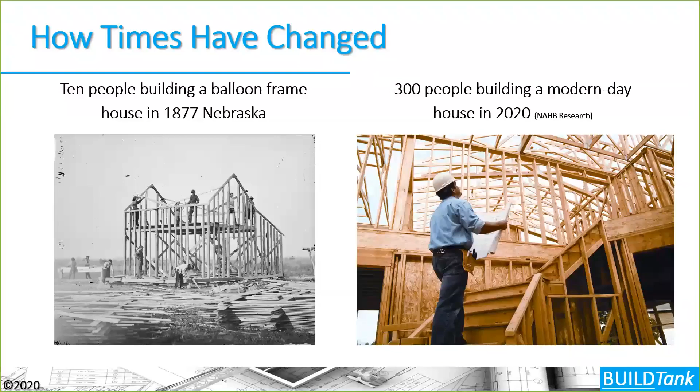Today, the National Association of Home Builders has helped to determine, through research, that around 300 people are taking part in building that house, which means each individual trade partner, builder, and architect has specialized at a specific function of putting that house together. We have lost, to some extent, our ability to understand the holistic approach and how things go together. Therefore, we've begun to adopt systems and processes to help us build better houses.

We also are seeing that our labor issues, supply chain issues, and other issues we have to deal with have made construction a little bit harder. But our expectations of our houses have gotten more robust over time as well. You see some houses here that were built in the early 1900s, and right next to them houses built in our present day.

This really demonstrates how our expectations of our houses have changed, not only from an aesthetic perspective, but if we take comfort, for example, we see that people literally want to be able to walk around inside their home from room to room and floor to floor in their underwear and be comfortable. That definition and quantification of comfort was quite different in the early 1900s. People were willing to work to create a comfortable home. They understood that they had to put on a sweater in the wintertime, put a log on the fire, or shovel some coal to create a comfortable environment.

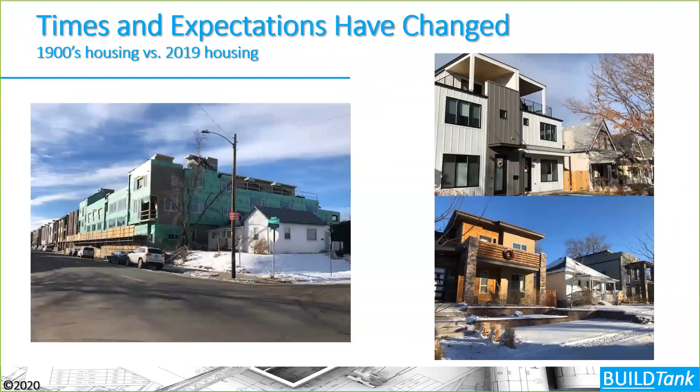Because that has changed so dramatically in our modern day housing, we've had to also change the way that we construct our houses and the way that we approach that construction. What we see is that codes and programs have embraced this notion of applied building science and systems thinking, these two avenues to help us achieve the house performance that we're trying to achieve today.

This notion of applied building science is really looking at all of these different components and how do we integrate them together into a home to create a home that meets those core expectations that people have of their houses - core expectations of not only comfort, but long-term durability, energy efficiency, aesthetically beautiful homes, indoor air quality, and health and safety. All these different things need to be integrated into our houses.

So we need to think about the envelope, ventilation, lighting, water efficiency, and all these different things, and how do we integrate that.

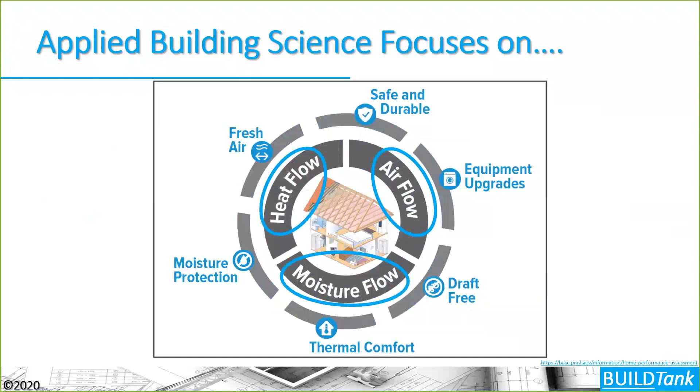If we take one step further and look at this a little more closely, we ultimately see that applied building science is really focused on airflow, heat flow, and moisture flow. How do we get performance out of the house? How do we get long-term durability out of the house? How do we get additional efficiency out of the house? How do we meet those core expectations? Well, we have to be able to control heat flow, airflow, and moisture flow in order to do that.

Which leads us to kind of the systems approach and thinking process for how we approach the building of a house. It is this more holistic approach rather than a component approach, going back to having a better understanding of the whole process of construction and how we integrate all these things together.

Another thing that systems thinking does is really revolve around this word synergy. Synergy meaning two or more things that come together to achieve something greater than what could be achieved by itself or on its own. These core expectations that our buyers and builders of houses have are examples of being able to achieve something that we couldn't achieve before. How do we get that beauty, that comfort, that durability from a house?

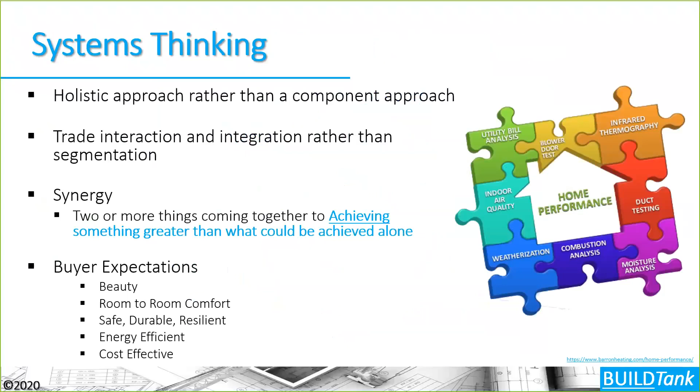When we're adding complex heating and cooling systems, we're tightening up the building envelope, we're adding insulation to our systems. And in the past, doing those things has created building durability issues. Now we can do it if we change our approach and create a house that performs and doesn't necessarily have those building durability issues.

Systems thinking and synergy can be thought of by thinking about how we bring two components of a building together. Normally we have one outcome we're trying to achieve. For example, if I'm bringing insulation and an air barrier together, I'm thinking about how to control heat flow through the building thermal envelope. Well, the reality is I'm also getting better air control in that house, better moisture flow control, and better indoor air quality. So bringing these two simple components together, we get a variety of outcomes. That's the synergy that's brought into it.

Thinking about that in the design phase early on in the project is what really becomes important. As we move into more of the Zero Energy Ready Home program discussion later in this series, we'll see that planning at the beginning of the process becomes crucial to ensure our goals for that house are achieved.

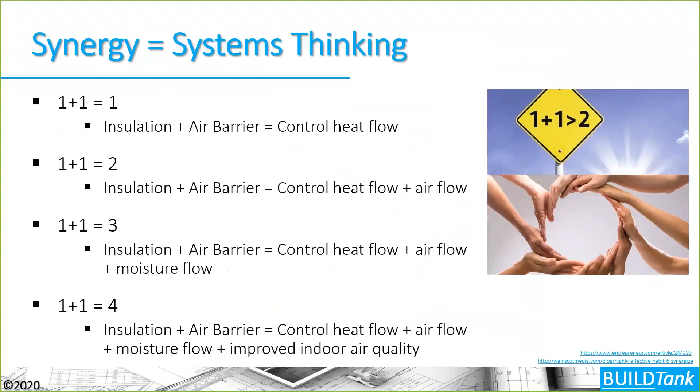When we think about building systems integration, we can think about 5 main components: the structure of our house, how we integrate the structure with the systems, from mechanical systems to insulation systems; the enclosure, how we keep water out of those systems and components; and the specific climate we're building in. The fifth thing is how people interact with these other systems, and how we create this whole product that integrates the structure, the systems, and the enclosure in the particular environment we're building in, so that people will actually be able to use it.

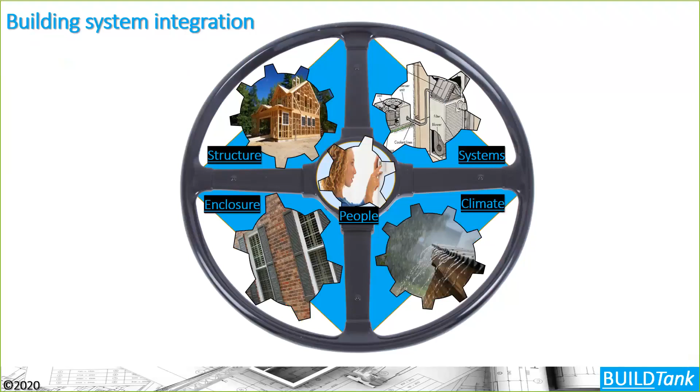Because people tend to be the wild card in our equation. People don't really know much about the house they're moving into. They don't know what they don't know. They don't necessarily know that they need to change a furnace filter or do continual maintenance on the house. They care about different things than we do in the construction industry. They have expectations of their houses, but how do we meet those expectations? We need to integrate this applied building science and systems thinking approach in order to meet those core expectations.

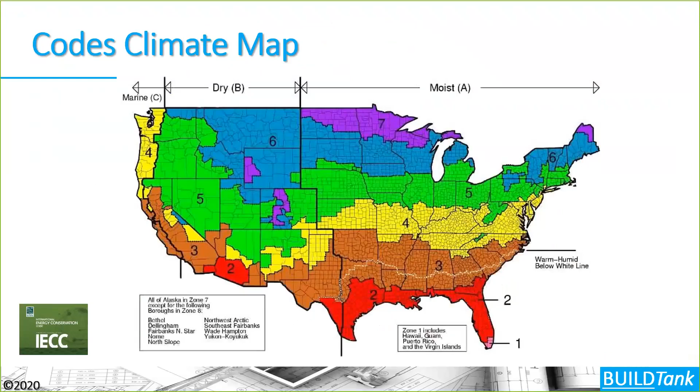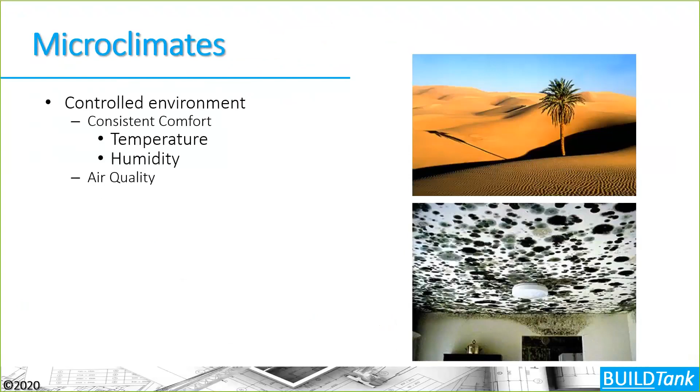Maybe a little bit less from a humidity perspective, but we do have a lot more humidity inside our houses than outside, which might lead us to think about how we're constructing our houses because of the moisture drive happening there. Taking into account the climate we're building in is very important. Some building science principles don't really change, but how we implement those principles could be slightly different in dry climate zones versus moist climate zones. We also need to think about the impact of climate zone on microclimates inside our houses - moisture being impacted by temperature and humidity. We're trying to control that indoor environment to get better indoor air quality and ensure we're not getting mold or other problems in our houses. So when we talk about gaining predictability and control, which we'll talk a lot about today, how do we get that predictability and control?

From a building science perspective, we get predictability and control by tightening up our building envelope, having well-insulated building envelopes, designed and well-executed mechanical systems, and whole house control mechanical ventilation. That control and predictability helps us manage the microclimates we create inside our houses within the bigger macroclimate of the climate zone we're building in.

Microclimates are generally in moist areas we're most concerned about—kitchens, bathrooms, laundries, crawl spaces, basements—locations that tend to trap or are bigger moisture sources inside our houses. But the reality is that the whole house is a microclimate within the bigger macroclimate we're building in.

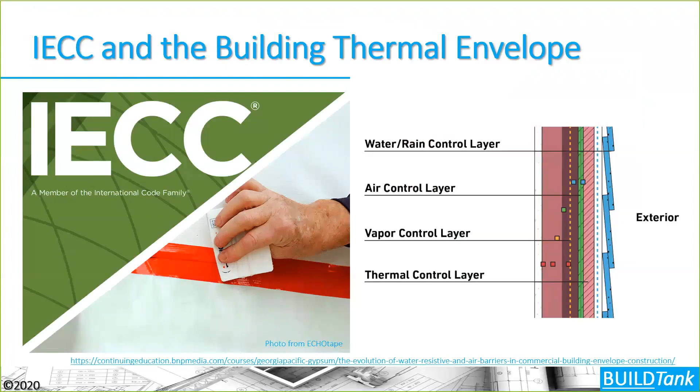The IECC and all these building programs really concentrate heavily on the building thermal envelope, trying to understand these different control layers—water control layers, air control layers, vapor control layers, and thermal control layers inside our building assemblies. The IECC has a new section developed in the 2015 cycle stating that the building thermal envelope shall be represented on the construction documents.

This highlights what's called, from a building science perspective, the red line test—meaning you want to be able to put your pen on a sectional drawing of your plans and continuously draw a line without lifting your pen off the paper around that building thermal envelope, to ensure you understand where the continuity of that thermal envelope is going to be and how you're going to execute that particular portion of it.

The building thermal envelope is also defined in the code, and that definition talks about all the different components—so the thermal envelope really is an assembly of things that separate the conditioned space from the unconditioned space in our houses.

We can see that the thermal envelope from a drawing perspective can be pretty straightforward, but when we're looking at that building thermal envelope inside the house, it might be difficult to determine exactly where we're going to have that envelope and how we're going to execute it to get control and predictability of airflow, thermal flow, and moisture flow.

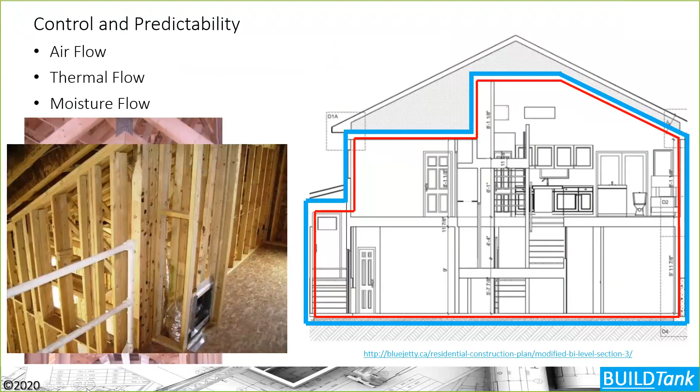So what the code is trying to do is ensure we can do that red line test, so that when we get into the field we can identify areas where we need to put those supplemental air barrier systems into our home. Air barrier systems are defined here too—we talk about the continuity of the air barrier system, which is defined in the IECC, and what an air barrier actually is.

Again, an air barrier is one or more materials that join together continuously to restrict or prevent the passage of air through the building thermal envelope. So we're really talking about assemblies of things.

Often when we talk about this air barrier system, we tend to think of it as one component, just the component on the exterior side of the assembly. I'd like to challenge us to think about it as a total assembly, which means that in its simplest form, we have interior drywall as the interior part, and we want continuity there. Then we have exterior sheathing as the exterior part. Together, we get a true assembly that goes all the way around our building thermal envelope.

Some may ask, what about house wrap or other weather-resistant barriers? Well, they're primarily drainage planes, because we know that moisture is going to bypass our siding, and we need to be able to drain that water down and out.

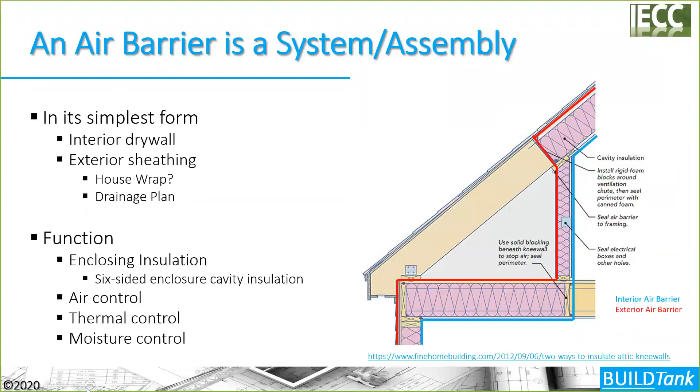Now the code helps us, and programs like Energy Star and the DOE Zero Energy Ready Home program have checklists that the code borrowed from to create this table, which gives us an idea of where we might need that supplemental air barrier system, where the drywall might not be adjacent to our thermal barrier, and therefore we might need to add thermoply, or if we're using spray foam, that might be our air barrier system.

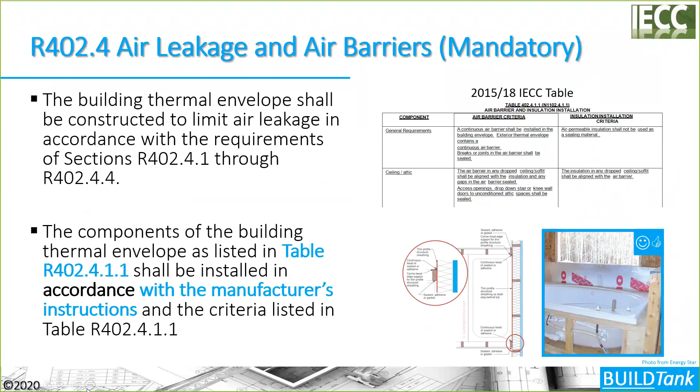And all of these things, the code falls back on manufacturer instructions, but there are some instructions in these tables and checklists from programs like Energy Star and the DOE program to ensure we've installed these things perfectly. But when we're talking about that air barrier system, the reality is we need to create an air barrier assembly that has these 5 key attributes.

Its continuity all the way around the building envelope, its strength, its durability over the life of the building, its stiffness, and its impermeability.

Sometimes we want to use flexible air barrier systems, and often those flexible air barrier systems cannot be installed well enough to actually perform. So if you stick with these 5 key attributes, you'll get a system that actually works.

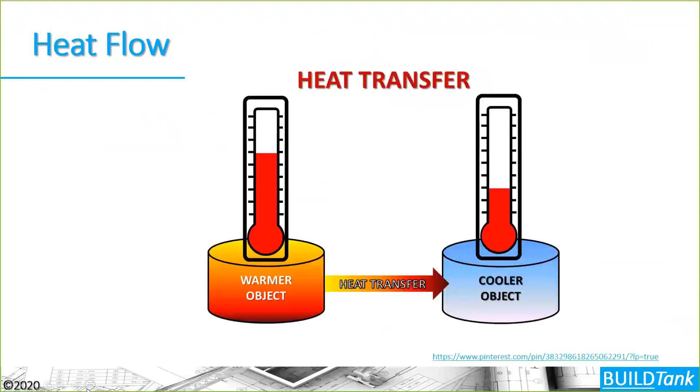So moving into the applied building science section, we're going to talk about thermal flow in our houses first, then airflow, then moisture flow. So if we break down thermal flow, we begin with the heat transfer mechanism with regards to thermal flow.

The first law of thermodynamics says that energy cannot be created or destroyed, that energy moves and changes form, that heat flow is an energy transfer mechanism, and that energy equals work plus a change in that internal energy system, or what we call waste. It's not that waste isn't energy, it's just that it's not being used for a useful purpose.

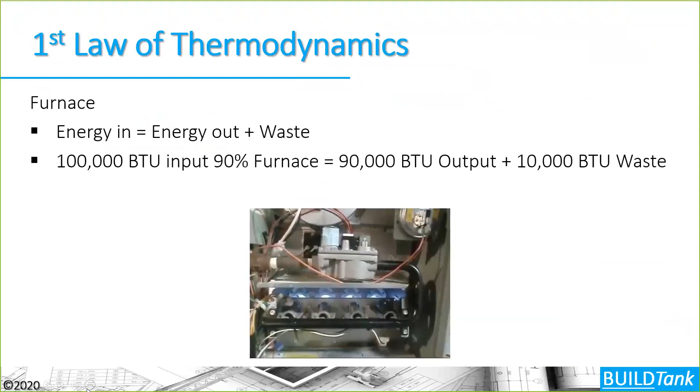An example of that would be a furnace, where energy equals energy out plus that waste. So if I have a 100,000 BTU furnace and it's 90% efficient, then 90,000 BTUs are the output of that furnace, and 10,000 BTUs is the waste, basically the amount going up the flue. That would be an example of this first law of thermodynamics.

Now, the second law says that heat moves from higher temperature regions to lower temperature regions, meaning basically always from hot to cold, or higher concentrations to lower concentrations. It never flows in the other direction unless you're adding additional energy to the equation. And no reaction is ever 100% complete, so there is some energy loss or waste in these equations. As energy is transferred and transformed, more and more of it becomes waste.

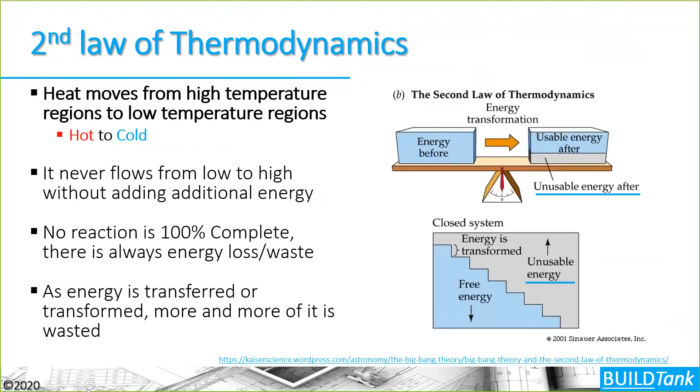So we want to be able to get as much out of it in that first transition from its source to its purpose, so that we have the least amount of waste possible in that system there.

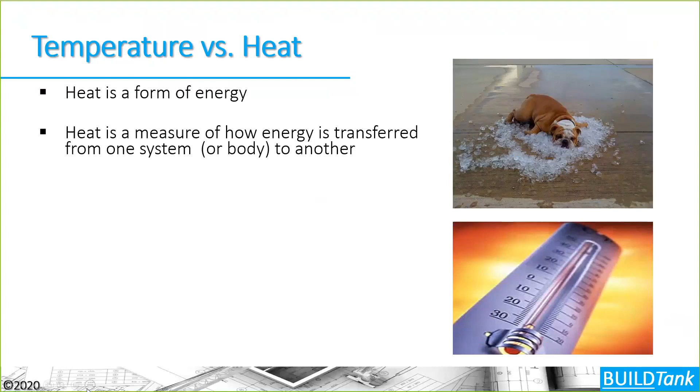Temperature and heat are also slightly different things. Heat is the form of energy, and heat is measured as the measurement of how energy is transferred from one system or body to another. So, for example, this dog's energy or heat is moving from the dog's body to the ice cubes, and it's actually the removing of that heat from the dog that's cooling the dog there.

Now, temperature is a measure of the internal energy of a system, a measure of how fast the molecules are moving, and this is basically how we can measure it using a thermometer here.

Heat transfer is the exchange of thermal energy between physical objects, so it's always moving, again, from hot to cold. And what we learn by understanding this is that things don't have to be hot necessarily to be able to move energy.

And so when we think about a heat pump, for example, a heat pump can take energy, can move energy from one location to the other location, as long as there's higher concentrations of energy in one location versus the other location. So in very cold air, for example, it's amazing how much heat or energy is in that cold air, that you can actually extract and bring into a home during the heating season and heat a house. Some of these heat pumps can

extract energy in air that's in the freezing temperature range. So it's pretty amazing here.

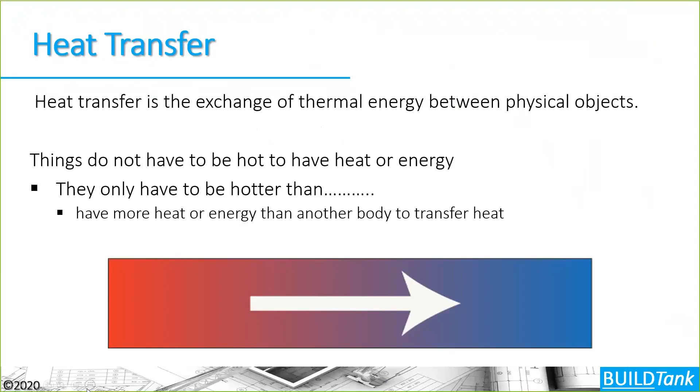This heat transport mechanism, and this temperature difference from inside to outside, are one of the key principles of what we call delta T, or the temperature difference, and the movement of energy from higher concentrations to lower concentrations.

It drives our design temperatures for our heating, cooling, and ventilation systems, our HVAC systems. Whether you're doing hydronic heat or using a forced air system, you're going to use a design temperature that's usually a worst-case design temperature for heating and cooling of that structure, and that's where it's governed by.

So to review just a little bit, the flow is always from higher concentrations to lower concentrations, and the higher the delta T, the greater the heat and air wants to escape or enter a building there. So we need to remember those principles here.

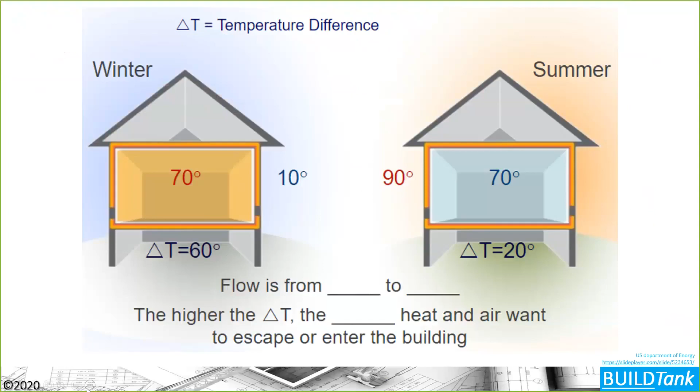There are two types of heat. There's sensible heat. This is the heat that's able to be sensed by that thermometer, the heat that's absorbed or added or released by a substance, and this is the energy described by the heat load calculations, the manual J's that we do to properly size our heating and cooling equipment inside our house.

There's also latent heat that we don't have a lot of here in Colorado, but this is the heat that's released or absorbed by a substance during a change in phase. This is the heat or energy that's stored in moisture in the air. That's why I say we don't have a lot of latent heat in Colorado, because we don't have a very humid climate here. This phase change is what describes latent heat.

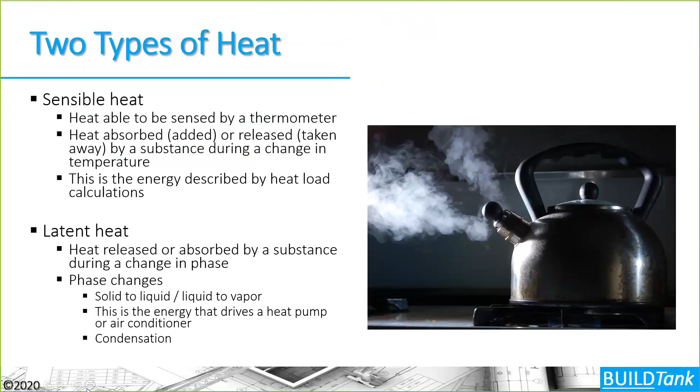So when we're moving from a solid, like a solid ice cube, to liquid water, into vapor, that is the description of this latent heat transfer mechanism that happens there.

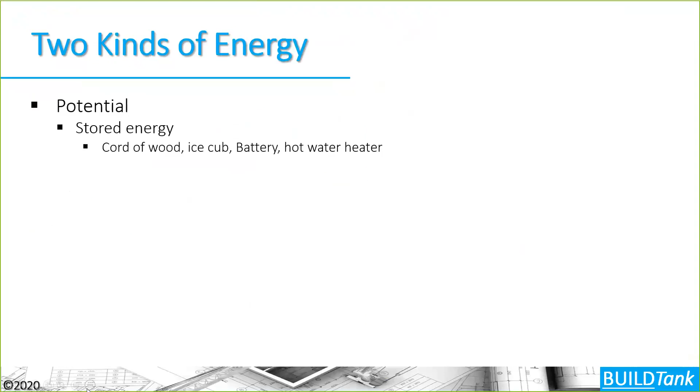Two kinds of energy: potential energy, which is the stored energy in wood or batteries or other systems, oil and gas, for example. And kinetic energy, this is the energy of motion, where atoms and molecules are in movement. The temperature of the energy is described by these atoms and molecules that are moving, that we can measure with a thermometer, for example.

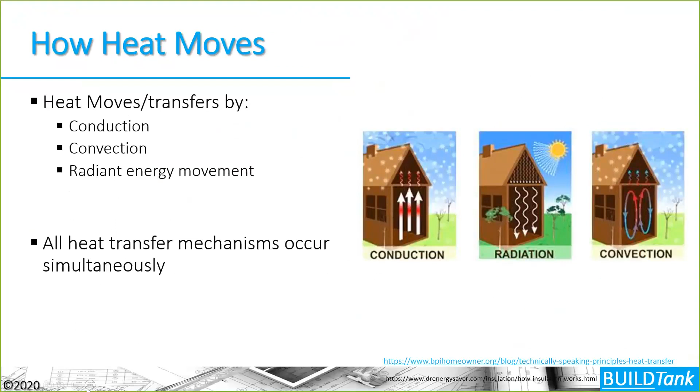Okay, so how does this energy or heat move in our houses? It generally moves by conduction, convection, and radiant energy movement. And all of these things are happening simultaneously, but we're going to break them down one by one.

And it's often helpful to understand a building durability issue or a building science question that you might have with your houses, if you can determine which is the most predominant heat flow mechanism that's happening through that particular piece of assembly. So understanding these things individually becomes important.

Conduction is the energy that conducts through a solid object, always again from warm to cold, or from higher concentrations to lower concentrations. When we think of conductive energy, we think of energy generally in the wintertime.

That's where we have a higher concentration of energy or heat inside of our houses, and it's moving through our assemblies from inside to outside, and we're using insulation to reduce that conduction through the building assembly. But we know that the energy will go more slowly through our cavity insulation, because it's a higher R value, than through our studs.

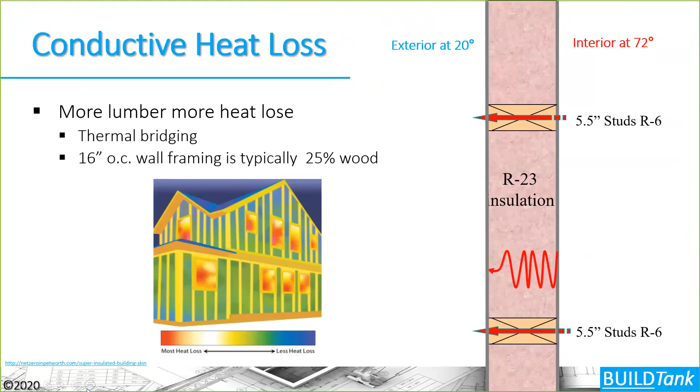So we're often struggling with how do we ensure that we're not getting large amounts of thermal bridging in especially cold climates where we're building. How do we reduce that thermal bridging, or that area where energy is going to move faster through our studs or other components of our buildings, like foundations. Foundations, and if we're not dealing with that slab edge of that foundation, can be a large source of thermal bridging or bypass in our assembly. So we need to think holistically about our whole house and where that thermal bridging is happening, and figure out details to be successful at slowing and stopping that thermal bridging, that thermal bypass through our assemblies.

Convection is the energy transfer of energy moving with fluids such as air or water. Convective loops are an example of convective energy movement inside of our houses, inside of our wall systems.

In a poorly insulated wall, you'll get energy or air warming on the warm side of the assembly. It goes up to the top plate, it rises as air warms, it rises. As air collects energy, it rises. It hits the top plate, it gets moved over to the exterior wall, and as it cools, it starts to fall, and you get this convective loop inside of a poorly insulated cavity insulation assembly.

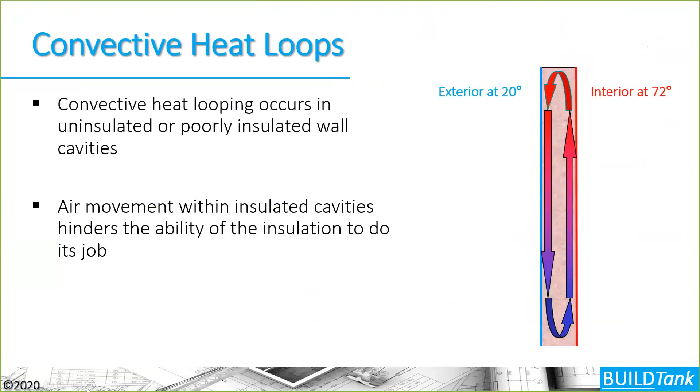Convective air not only moves potentially in our wall systems, but in our houses. Convective loops are a good way of distributing heat around our houses or energy around our houses, but we want to make sure that we control that convective movement of energy so it's not moving outside of our houses.

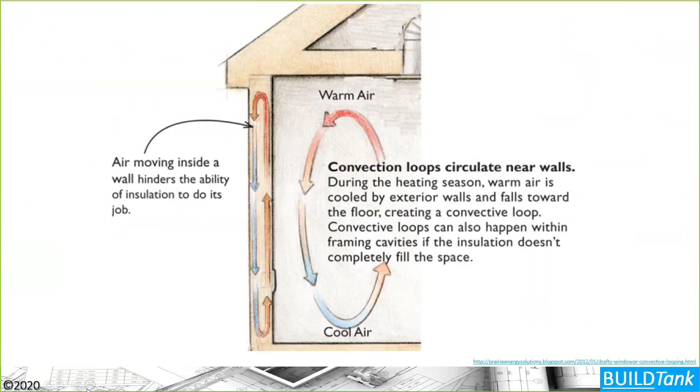Energy moving with air, we want to control it inside the building envelope. So again, a tight structure. Properly insulated and sealed assemblies are largely how we do that. So we need to think about how do we achieve that assembly.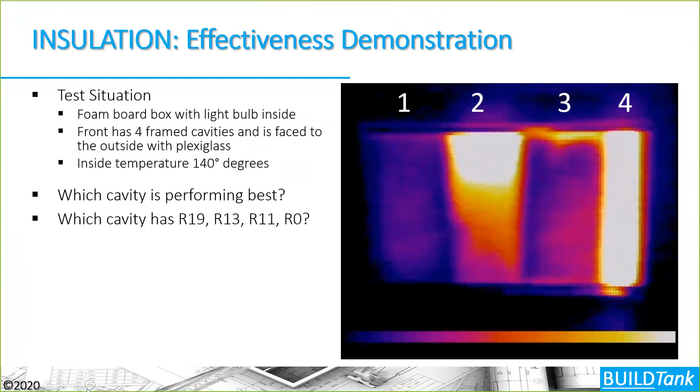And I think we would agree that the number one cavity is performing best here. So which cavity, is it performing best because it has the highest R value or because the insulation was installed the best in that cavity?

When we break it down here, we see that the first cavity has an R11 bat that was installed perfectly to a grade 1, or the requirements of code, with a proper air barrier system on all 6 sides of the cavity. Cavity 2 was an R19 cavity, so it had the highest insulation in the cavity, but it didn't have the best installation.

It has this gap at the top, so we have some bypass around the insulation here. Cavity 3 is installed better than cavity 2 with less insulation R value, but it's performing better than cavity 2 with the higher insulation R value because it's installed better, had a better air barrier system, better bat install. And cavity 4 had no insulation in and no air barrier system to the inside.

So this is just to show us that installation is really as important as R value. We need to make sure that we install the R value properly in order for it to perform. We'll talk about that in a little bit more here in a second.

The last way that energy moves in our assemblies is by radiant heat transfer, and this is energy that flies through open spaces.

The biggest example of radiant heat is the energy moving from the sun to our planet through open space, or from a fire to our bodies on a cold evening. It's interesting to think about radiant heat transfer because it's a very linear pathway of heat movement. If I'm standing by a fire, my front side might be nice and toasty, but my back side is going to be cold, because the energy can't move laterally around my body. It moves linearly, in a straight line.

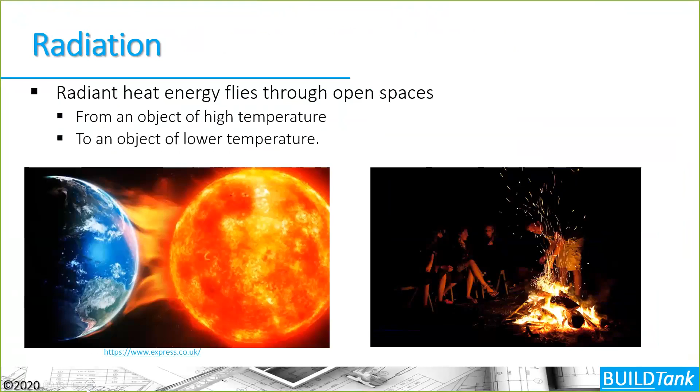Radiant barriers are sometimes used to help control this flow of radiant energy. We don't use a lot of radiant barriers in our climate, especially up in the mountains, but if you see anybody recommending a radiant barrier below a slab or in an attic, you need an air gap in order for that radiant barrier to work.

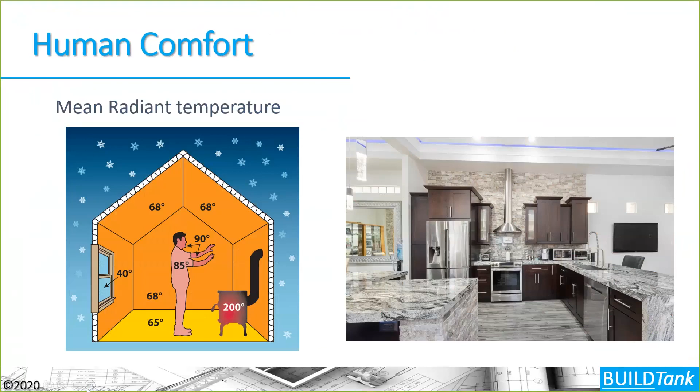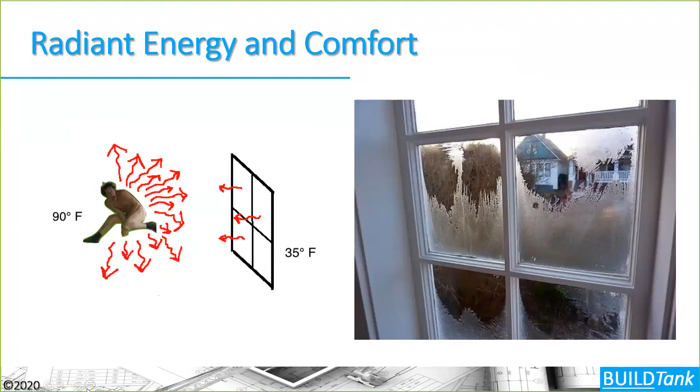Radiant energy has a huge impact on our comfort inside a home. This notion of mean radiant temperature is that our body heat will radiate to colder surfaces inside our home. If I can raise the surface temperature of the surfaces around me, I can be more comfortable. In some cases, like with large areas of granite countertop, that granite is a relatively cold surface - it's hard to warm up and keep warm. So I can be in my kitchen cooking and actually be cold just because my body temperature is radiating to that cold granite countertop, or radiating to the cold surface of a window.

These are things that help govern our human comfort. We have environmental variables - air temperature, relative humidity, air movement, and mean radiant temperature - the things that surround us. If I get better control of these things, I'm going to have better comfort inside my houses. Building science and system thinking can help me do that. And there are personal variables - the clothing we choose to wear, and our personal metabolic rate - impacting our human comfort as well.

When we think about these thermal transport mechanisms, we have to think about thermal transmittance - basically how building assemblies deal with conduction, convection, and radiant heat flow all at the same time. But if we break them down, we can often figure out what's happening in a particular component of the building, because it might be driven more by conduction, convection, or radiant energy flow than the other two. If we can determine that, we might be able to fix an issue, whether it's a warranty issue, or how to upgrade an existing building.

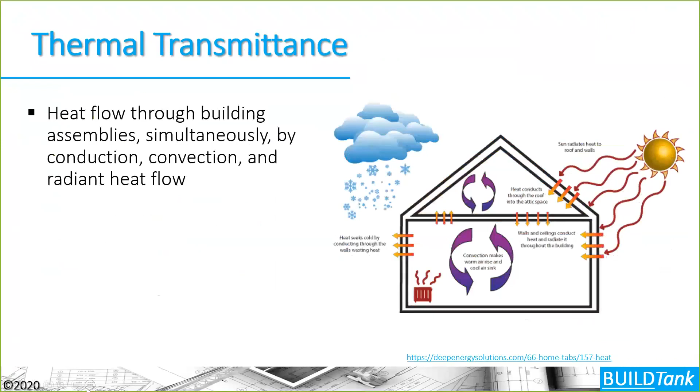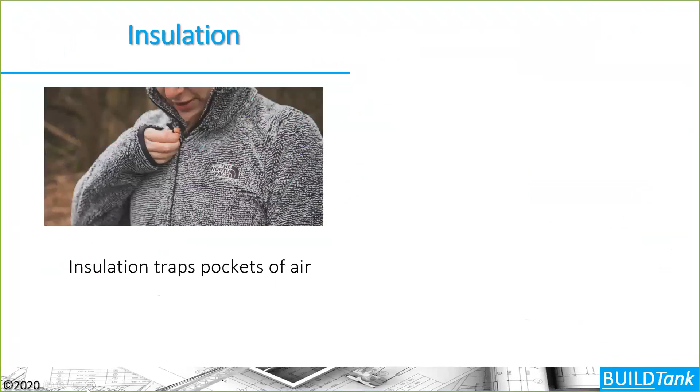Air sealing, from a code perspective, is largely looking at manufacturer instructions for how we install insulation inside of our assemblies. Codes and programs generally rely on the code in this section as well. When we're talking about insulation, just like insulation we wear on our bodies, the object is to trap a pocket of air. It's the pocket of air that creates the R value, the resistance to the flow of energy from high concentrations to low concentrations.

Ultimately, we need a stagnant pocket of air. Because if I wear a fleece jacket out on a cold and kind of windy day, the pockets of air being trapped in that fleece jacket are going to leave it, and I'm going to continue to be cold. So what do we do up in the mountains? We put on a layer of plastic, in essence an air barrier on top of the thermal barrier, or a shell on top of that thermal barrier.

So I have my interior air barrier, which is my skin. I have my thermal barrier, which might be a fleece jacket. And then I have an exterior winter shell that is my exterior air barrier system. I'm able to trap that pocket of air, and I'm able to stay out in the cold elements much longer.

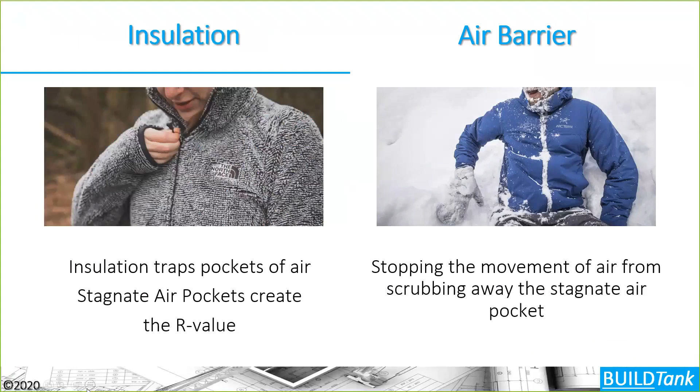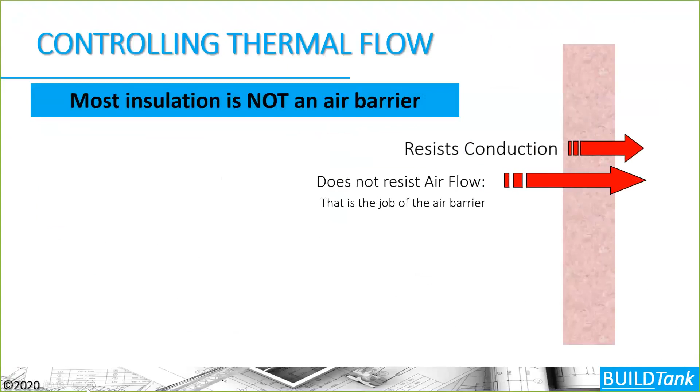Similarly in our houses, we've got a thermal barrier, oftentimes an air-permeable fibrous insulation that resists conduction but doesn't necessarily resist the flow of air through that assembly. So when we're talking about cavity insulation, we're talking about six-sided enclosures, so that we can resist this myth of insulation - insulation doesn't stop the movement of air itself. The object of that insulation is to trap a pocket of air, but I need that six-sided enclosure to ensure that pocket of air is stagnant, so I get the resistance to the flow of energy described by the R value of the material being installed.

Okay, let's talk about airflow now, and let's break that down. How does air flow in our houses? I like to think about airflow as a freight train. If you think about a freight train, it's carrying cargo from point A to point B.

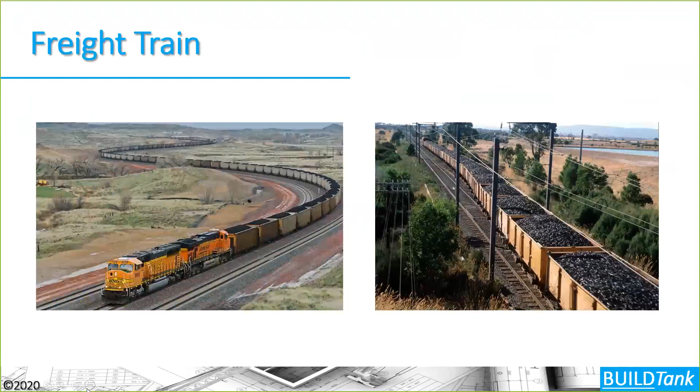From an air perspective, it's also carrying cargo. It's carrying heat, other energy, moisture, and pollutants. The problem is that it's taking it from point A to point B, and we don't want it to deposit its load unless it's depositing it all the way outside of the house. If it's depositing a load inside our building assemblies, that's when we tend to get into trouble.

Now, this question we get all the time, and hopefully everybody can agree the answer is no, that we're actually asking the wrong question. We're ultimately trying to figure out how do we gain control of the airflow in our houses. The tighter we build our houses, the better off we are, because we gain better control and predictability of the airflow and the cargo that air is carrying inside our houses.

So what is the real question we should be asking? We should be asking, are our houses underventilated? And the resounding answer still, unfortunately, is yes. So this mantra becomes super important: we want to build tight and ventilate right. We want to build as tight as possible to gain control and predictability of airflow, moisture flow, and thermal flow, and ventilate correctly for the occupants and background moisture control inside our houses.

Codes and programs, the DOE Zero Energy Ready Home Program, and all the codes now understand this principle to varying degrees, but building tight and ventilating right is required by all these things. So ultimately, you're trying to gain control and predictability.

Control and predictability, similar to McDonald's when I go and order a Big Mac in Frisco, or Denver, or Paris, France, or New York City. I know exactly what I'm going to get. The predictability is astounding. I know what I'm going to get, and I know how I'm going to feel after I eat that Big Mac. All these things are predictable. So that's the type of control and predictability we're trying to get.

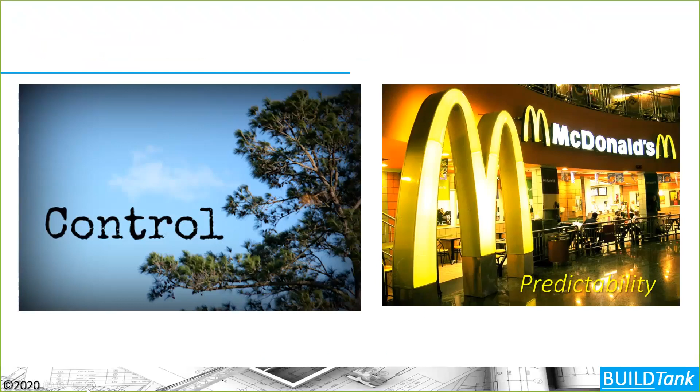So when we're building a house, we need two things for air to move in and out of that building thermal envelope: we need a hole, and we need some type of pressure difference around our house. Codes and programs are helping us understand how to control the holes in that building thermal envelope. We have a better chance and more ability to control holes in our building envelope than ever before, and we need to do that.

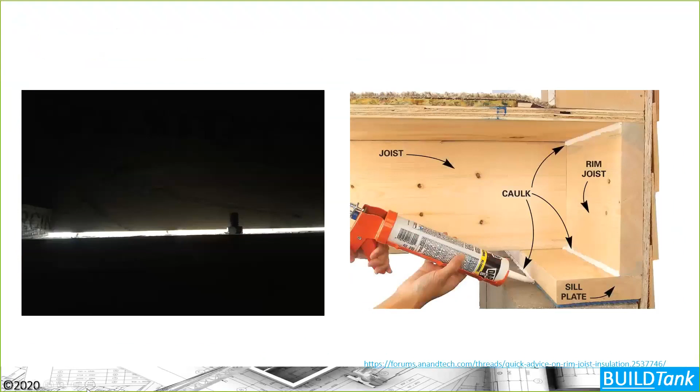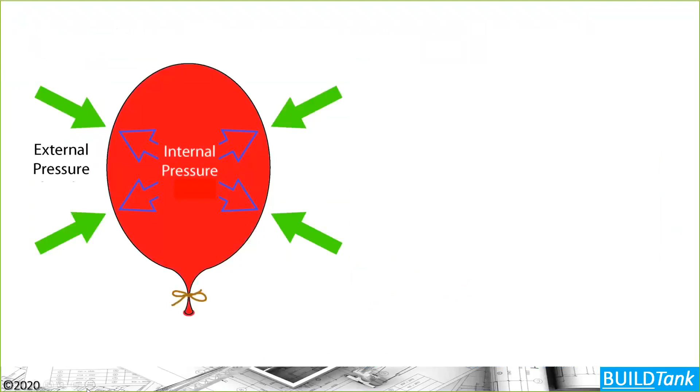But if I untie the string there and create a hole, then the pressure inside is greater than the pressure outside, and I'm going to deflate that balloon, and air is going to move through the hole from inside the balloon to outside. So we know that we have holes. We haven't yet been able to build a completely airtight house, but we're getting better and better at that. We also have constant pressures on our houses.

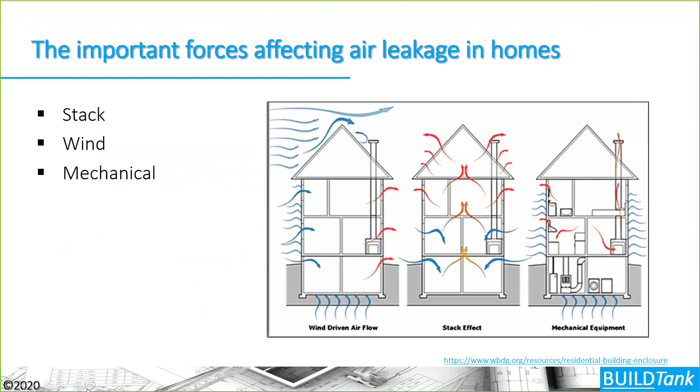We have this thing called stack effect, wind effect, and mechanical effect, or pressures on our houses. So let's look at these individually. Stack effect just describes what happens to air as it warms. Again, as we talked earlier, as air warms, it rises.

As warm air rises, it hits the top planes of our houses, the top boundary of our thermal envelope, and in essence it's seeking a hole. If it finds a hole at a can light, a connection between drywall and the top plate, or through a plumbing vent, it's going to leave the house. And any air that leaves the house has to be replaced by air coming back in.

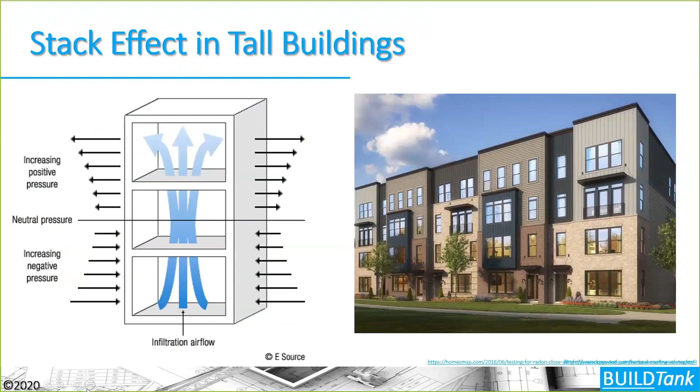The accentuation of stack effect happens with the difference in temperature—the greater the difference from inside to outside, that delta T—but also because of the height of the building. Any air that leaves on the high side comes back in generally on the low side of our structures, so we often concentrate on those high side holes and low side holes in our building envelope.

Wind is another constant effect, or pressure, that's being imposed on our houses. On the windward side, we generally get a positive pressure. On the leeward side, we get a negative pressure, and that pressure is translated through our building as well. So I can be pushing air into my home through holes in my building envelope, and I can be sucking air out of my building through holes, just because the wind is blowing there.

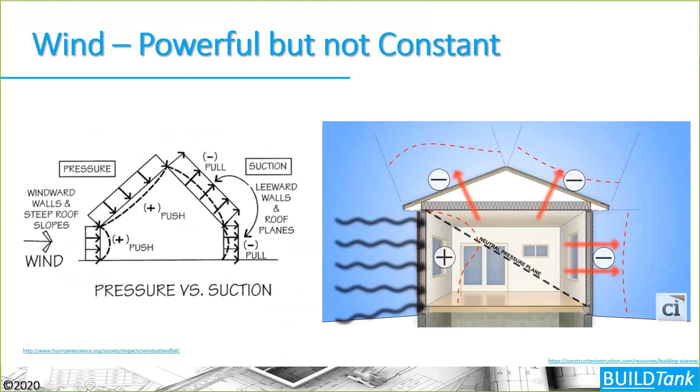If I can control the holes, I'm not going to be able to control the wind out there, but if I can control the holes, I can control the air that's moving through those holes, and what that air might be carrying.

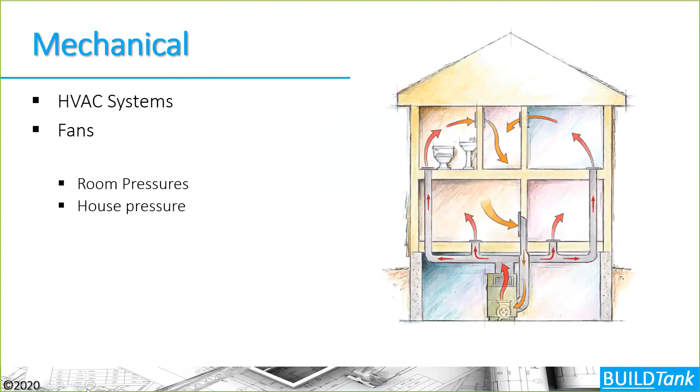Now the last one we have is the mechanical systems in our houses. The mechanical systems create pressure differences in two ways: individual room pressure differences, and whole house pressure differences as well.

Here's an example of pressure differences created by unbalanced leakage in our duct systems located outside our building thermal envelopes. On the return side, if I have greater return leakage, then on the supply side I'm going to be supplying more air than I'm returning from the house, and therefore I'm going to be blowing that house up like a balloon slightly, pushing all the air against those exterior thermal envelope surfaces, and if there are holes, it will be going out of the house.

If I have more supply side leakage, it reverses, so I'll get a negative pressure and I could be sucking air in from the outside. In Colorado, especially up in the mountains, our air is generally drier outside than it is inside of our houses. So return side leaks could be even more detrimental because I'm pushing warm, moist air against those surfaces and potentially out of our houses.

So just to summarize, air is a fluid and will move if there's a path present and a pressure difference across that path—if there's a hole or a driving force across that hole. Driving forces are just another way of talking about pressure difference across that hole. We need to remember that air in equals air out, and air out equals air in.

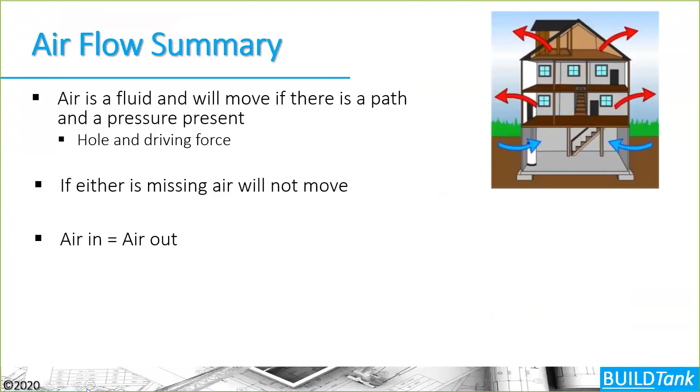If we have a quantity of air in our houses, we generally quantify that as a cubic foot of air—how many cubic feet we have. A cubic foot is about the size of a basketball. Most houses have somewhere between 25,000 and maybe 60,000 cubic feet of air. If one basketball leaves, another basketball has to come back in to that house.

So this is a 100-year-old house, and we might ask, why is this house a 100-year-old house? Because it's drafty, it's uncomfortable, it's not necessarily meeting the expectations of the occupants. Because it's not meeting those expectations, if we make changes to that building, we could be creating a big problem. The main reason this is a 100-year-old house is that it has tremendous drying potential. So we're going to start moving into this notion of moisture control in our houses.

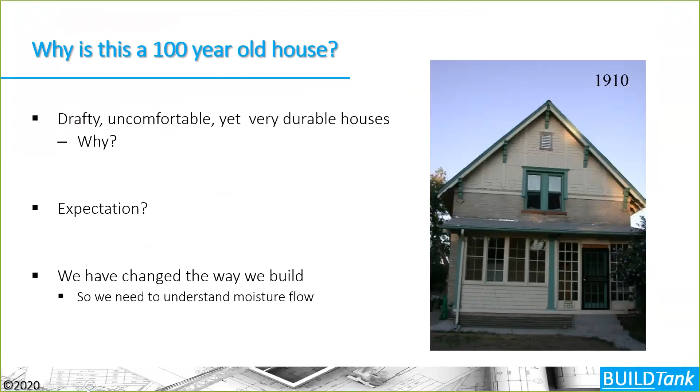Our buildings get wet, and we ultimately need to let them dry. They get wet from the outside, they get wet from the inside, they get wet from the start, and then there's the potential for repeated wetting through condensation in our houses as well. Moisture flow transport mechanisms are gravity, capillary action, diffusion, moisture moving with air in its vapor state, and condensation in our buildings. So we need to deal with this moisture control issue.

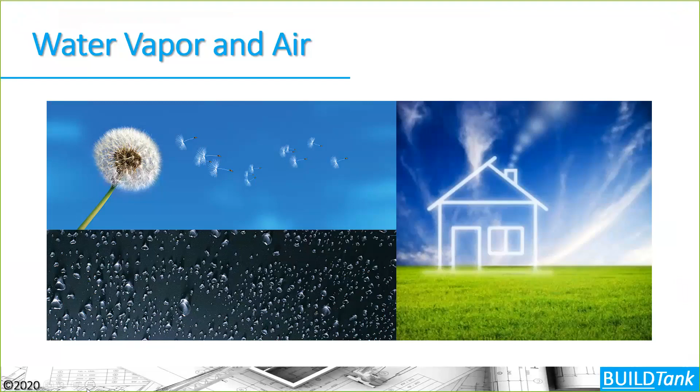It's one of the bigger control issues we have on our houses, because moisture is the number one thing that destroys houses over time. Let's think about moisture in its vapor state, and think again that air is a transport mechanism, therefore air and vapor are one—they equal the same thing here. When air moves, moisture is going to move with it.

In this example, I've got a typical back door here, and whenever we turned on the HVAC system in this house, it turned out we were pressurizing the house, and air would bypass this poorly weather-stripped exterior door. When you opened up the exterior door, you'd see condensation and ice forming on those cold surfaces. So think again—not only if you have an HVAC system, but if the wind is blowing on your house, you might be sucking air out of a hole in your building envelope and creating problems.

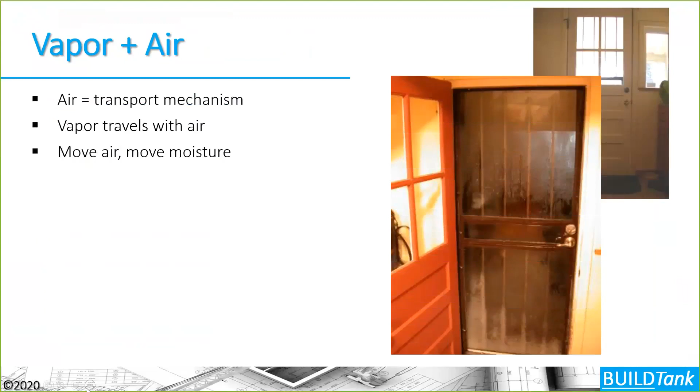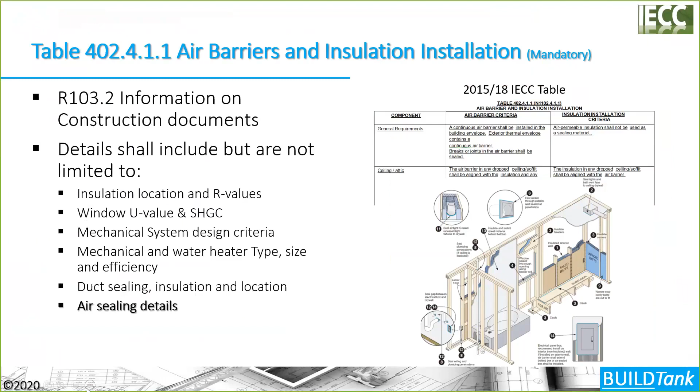Being able to control the holes in our houses, making that a tighter house, we can control the potential condensation happening inside our assemblies, because air out equals air in, and air in equals air out. Build tight. Now, again, the code and programs like Energy Star and the DOE Zero Energy Ready Home program have us looking at these details through checklists, or from a code perspective, asking us to actually detail out these air sealing details on our plan set so they can be executed when we're building that house out in the field.

Relative humidity is a really important part of this mechanism. We need to think about the amount of moisture held by air compared to the maximum amount possible. The maximum amount possible creates saturation, or 100% relative humidity. So humidity is the capacity of air to hold water vapor, and it's a function of temperature. If you think about temperature as a towel and the size of the towel, then we can have an understanding of what's happening here. The warmer air is like having a bigger towel—it has the ability to absorb and hold more of that moisture than it would otherwise.

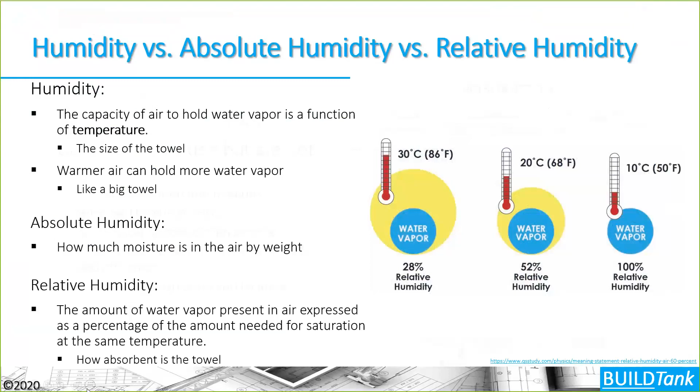Absolute humidity is how much moisture is in the air by weight, and relative humidity is the amount of water vapor present in the air, expressed as a percentage of the amount needed for saturation to occur. So ultimately, how absorbent is that towel, and how saturated, from a percentage standpoint, is that towel? Is it 50% saturated, or is it 100% saturated where water's starting to pour out of the towel? The towel just can't hold any more of that moisture.

This is becoming more and more important to understand because of some new research coming out. From a building perspective, we ultimately want the air to be as dry as possible—we want that moisture content in the air, the relative humidity, to be low, because moisture potentially creates condensation and building durability issues with mold and other things in our houses. But from an occupant perspective, this new research shows that the ideal relative humidity in our houses is in the 40 to 60% range, because it helps decrease infection, reduces allergies, improves healing in our bodies, and improves hydration, and can ultimately increase work performance.

Now that we're working more from our homes, that could be an issue. So balancing ventilation with relative humidity, and having better control to ensure that relative humidity is not getting within our building assemblies, is becoming more and more crucial, because we potentially want higher humidities for occupant health in our houses—but again, that needs to be balanced with the health of our buildings as well.

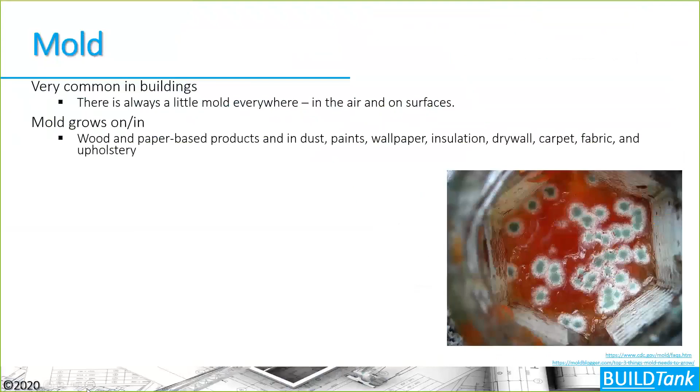Moisture control is primarily an issue because we're trying to control mold growth in our houses, which is very hard because there's mold everywhere in our houses. Mold needs wood or paper-based products to grow, and we have a lot of those, but it can also grow on paints, insulation, carpets, and other areas of our houses. We need that mold spore and the nutrients, but ultimately we need moisture—and if we can control the moisture and the temperature in our houses, we can generally control the mold growth happening in our houses.

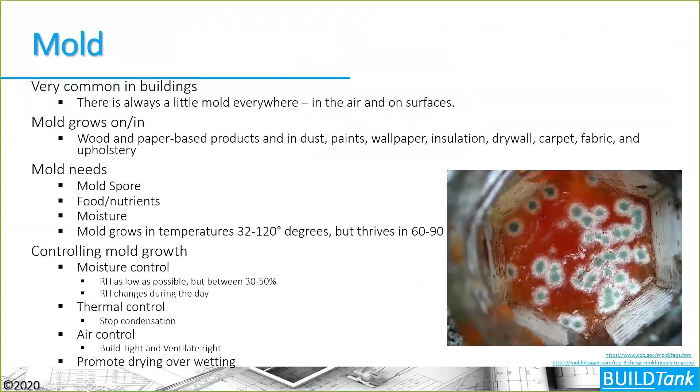So again, we need to control moisture, thermal, and air movement in order to ultimately have a home that can control mold growth. Ultimately, we want to promote drying mechanisms over wetting mechanisms. The other ways moisture moves in our houses—we've talked about water vapor moving with air—but we need to talk briefly about bulk water, capillary action, diffusion, and condensation.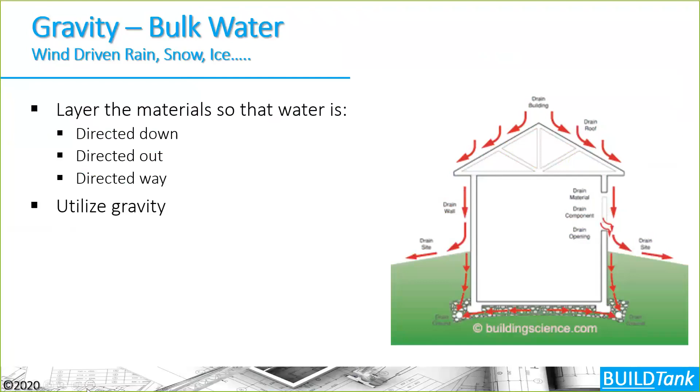Bulk water, we generally have control over. We understand that we want to let that water hit our structure, be able to drain down, and then ultimately, using gravity, drain that moisture away from our houses. It's all about execution and how well we do those exterior water control layers. So we're using different weather-resistant barriers, the new zip systems, potentially foam sheathing, liquid-applied membranes, or house wraps—all these different things to control that bulk water.

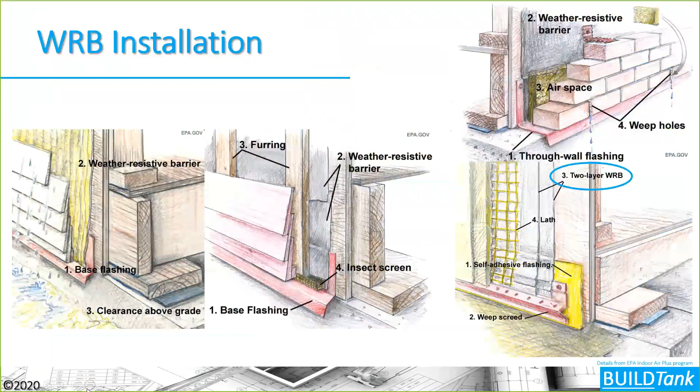And ideally, we're using some type of vented rain screen technology to give at least a 3/16 inch air gap, allowing moisture to move down and potentially dry out behind our first source of protection, which is our exterior siding, and then our second source of protection, which is that true water control layer on the exterior of our homes.

Capillary action, or capillary breaks, is about trying to keep moisture from moving through generally our concrete building materials up into our houses, into our wood assemblies. It's important not only to understand how capillary action moves water up through the pores of our materials, but what materials are actually capillary breaks and what aren't, and where we install those materials. Sill seal is a great example of that, because it is primarily a capillary break.

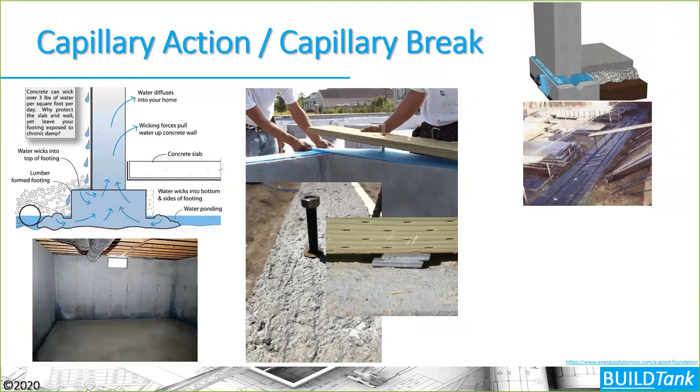It's generally not installed well enough, or our foundations aren't level enough, and/or we shim the sill plate, so we often aren't getting good enough air sealing through that sill seal installation. But that sill seal is crucial from a capillary break perspective. So we want it installed well, but we have to remember to come back to this location and air seal it properly, per the instructions in the code tables and the checklists from programs. And then we need to think about the true capillary break at our footing-to-foundation wall, or underneath our slabs, to get the right capillary breaks in the right locations.

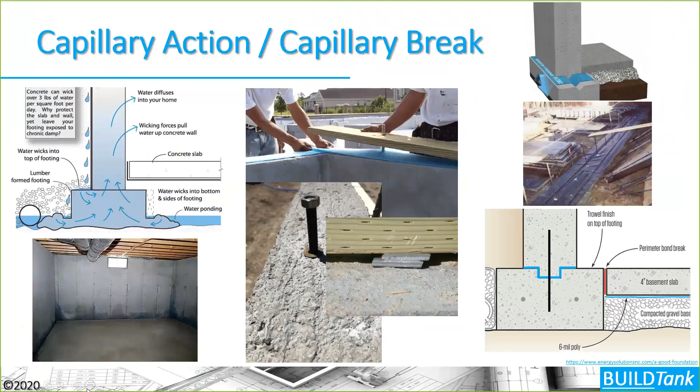Vapor diffusion is a process where vapor moves not necessarily with air, but directly through the pores of materials, generally from higher concentrations to lower concentrations. Because we have more moisture inside our houses than outside, we see this moisture moving directly through the pores of drywall primarily, from higher concentration to lower concentration, and it's a function of temperature and percent relative humidity.

What we've learned through a number of experiments—this being the main one done over and over again—is that there's more vapor transport by air leakage than by the process of diffusion. Over the course of a heating season, with 70-degree air at 40% relative humidity, only a third of a quart of water was able to diffuse through this sheet of drywall, versus 30 quarts of water able to move through a one-inch square hole.

And remember, if you're not using airtight outlet boxes, you have about 1 square inch of net-free area every 6 to 8 feet around your house. So getting that control and predictability, we want to seal up those boxes and make sure air isn't carrying moisture into our assemblies, because the process of diffusion is pretty small, especially after you've painted that wall and you have a class 3 vapor retarder in there.

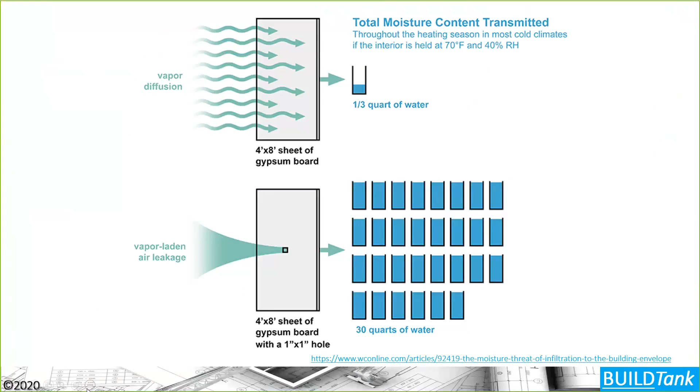But if moisture is getting into those assemblies, either by diffusion or from air leakage, we're worried about that first condensing surface. What's the temperature of that exterior sheathing? Is that moisture going to condense and turn into its liquid state? That liquid state is the danger state. If we can keep it in its vapor state, it has the ability to potentially dry back out, or diffuse back out of the assembly.

But if it hits its water state, it's just going to be absorbed by that material, and repeated wetting is what's going to create the molds and destruction of those assemblies.

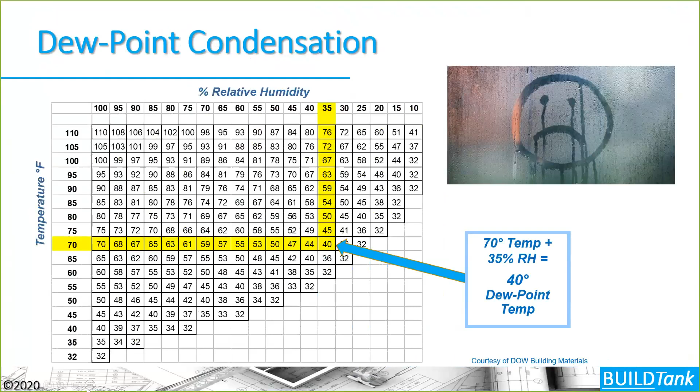So this is a dew point calculator. It's based off of a psychrometric chart, and it tells us that if we have 35% relative humidity at 70 degrees, and that air hits a surface temperature that's 40 degrees, we're going to get condensation in that assembly. So how do we raise the surface temperature of those condensing surfaces here?

One way to control this is to add vapor retarders, but if we add vapor retarders and we don't deal with the air leakage, then we're going to get moisture that bypasses those vapor retarders in our assemblies, and they're going to trap moisture in those assemblies.

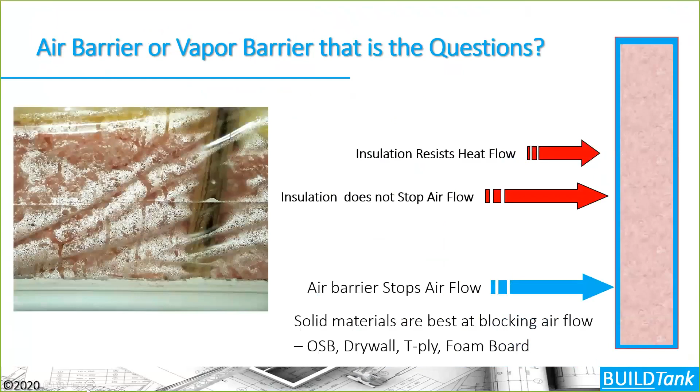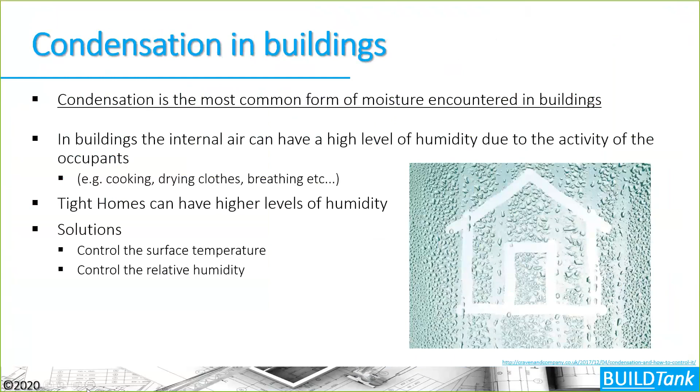Another way to deal with condensation is to build tighter homes and either control the surface temperature or control the relative humidity in the house, or do both. And so controlling surface temperatures might mean...

Controlling diffusion might mean installing vapor retarders much better than we normally do, ensuring that we're overlapping seams and taping it, that we're putting vapor retarders up against our openings and sealing it to those openings, using outlet boxes that have flanges that we can seal it to, and installing vapor retarders continuously around the envelope and not just haphazardly around the envelope.

Or we can increase the surface temperature of our surroundings, or we should be doing both really. And this could be done by lowering the U value of our windows or putting exterior foam sheathing on the outside, all these different methods of increasing the surface temperature to reduce condensation.

And this was a new voluntary test that can be recognized on the NFRC labels of the windows that we achieve, that gives the condensation resistance for that particular surface there, which I thought was kind of interesting.

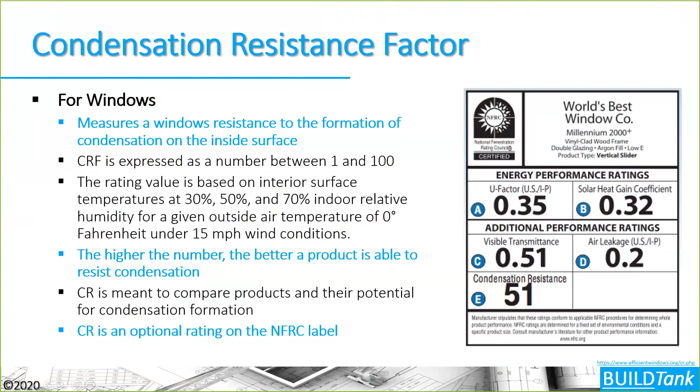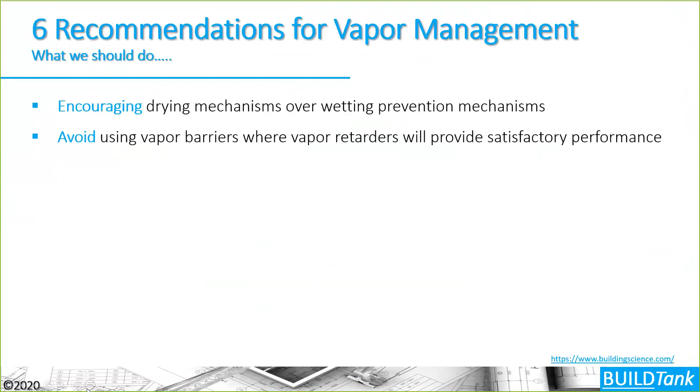And then when we're talking about vapor management from a diffusion perspective, we want to talk really about drying. How do we encourage drying mechanisms over wetting mechanisms? How do we avoid using vapor barriers where vapor retarders will provide enough performance? How do we avoid using vapor retarders when vapor permeable materials provide satisfactory performance? Avoiding the installation of vapor barriers on both sides of our assemblies, unbeknownst to us.

So we need to start this planning in the planning stage and material specification stage to understand the vapor permeance of our materials. How do we avoid vinyl wall coverings and encourage proper ventilation in our systems to ensure that we have control here.

Okay, in conclusion, again, starting early in the process with a systems thinking and applied science, building science solutions perspective, how do we plan properly to build that house so that we can control and gain better predictability of heat flow, airflow, and moisture flow in our houses?

We know that the codes and the programs that we're dealing with are asking us to build a well-defined building thermal envelope that has continuity of the insulation and air barrier system all the way around it, and that all the control layers are in continuity, especially the moisture control layer, all the way around our building assemblies.

The codes and programs that we're dealing with have incorporated this applied building science, and we need to take advantage of understanding what the codes and programs are asking us to do early enough in the process so that we can ultimately execute it well out in the field.